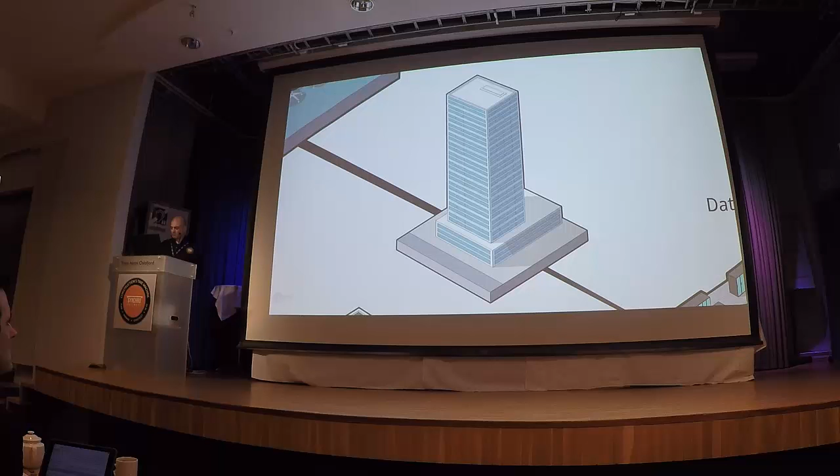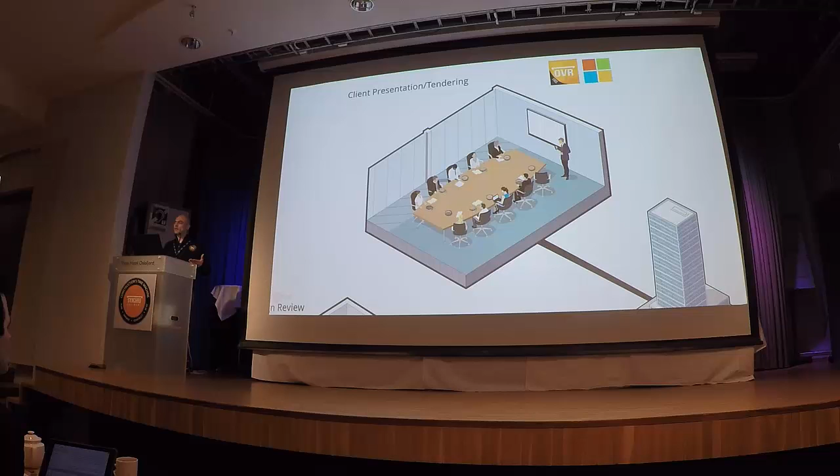So if you think about a scenario - a tendering presentation - you might have open viewer running and have your HoloLenses distributed around a table for your customers to put on. That's just a connection back to the server and through our API. We recently did a project with Skanska where they took a holographic animation model pulled directly from our Link server and presented the 4D animation as a hologram experience to the client. That job was recently won by the client. To my knowledge, it was the first time a 4D hologram had been used to present the approach to the project - not just a projection on a screen, but an interactive hologram.

We'll also look at this after the break too. We're getting into how you could interact with the 4D model with new forms of hardware—not just the HoloLens, but new ways of scrolling and spinning through time.

This is actually one of our customers, Steve Moore, who has prototyped this controller that lets you completely spin through the Synchro timeline just by spinning this dial. It takes away the need to use a mouse or be an expert in Synchro. These are pictures of the actual production happening at the factories. This is a full-blown prototype, now going into production and will be available soon in the market.

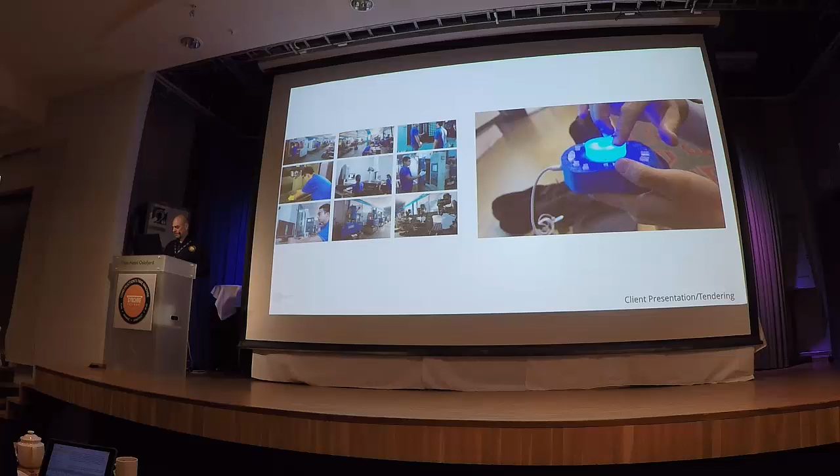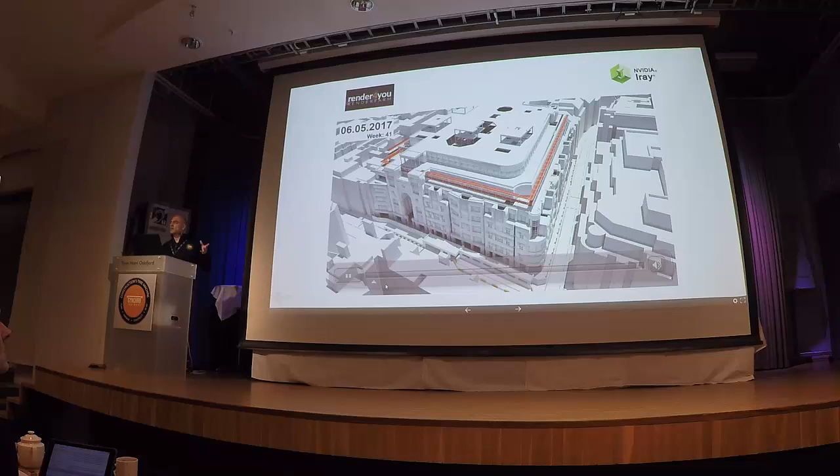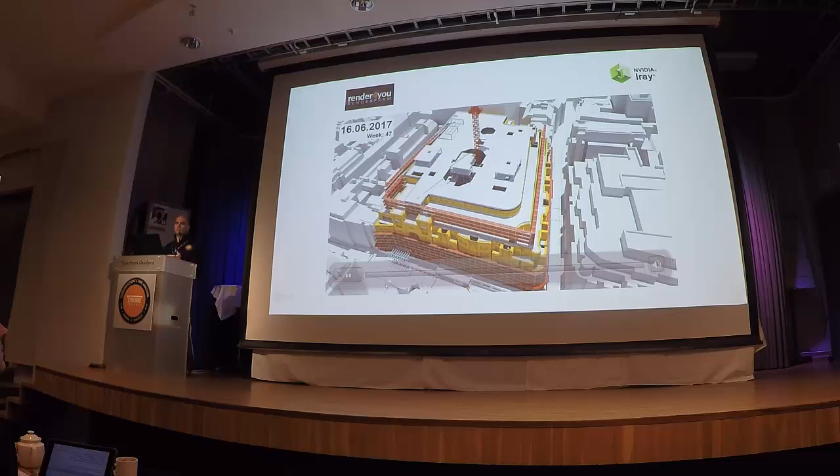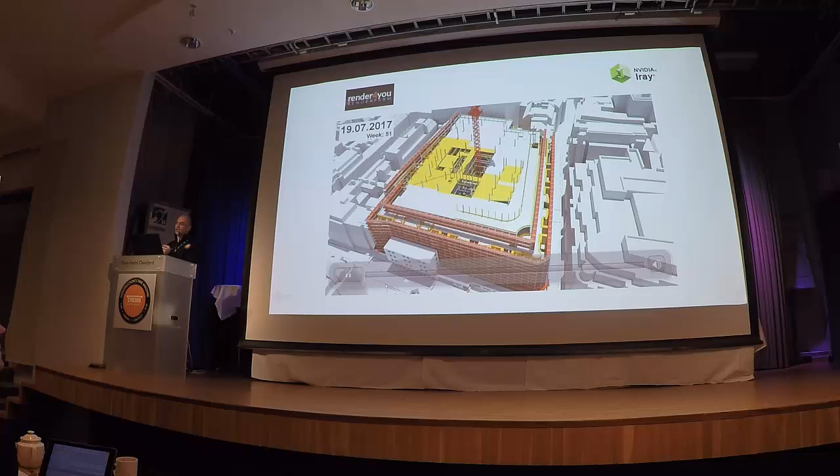Then we get into integrations with higher quality rendering engines. This is a use of NVIDIA iRay, rendering out on a render farm. With the new release, we'll be able to distribute a rendering over multiple nodes to cut down on the time it takes to render with something like NVIDIA iRay. This is just a way to take the quality up a notch for client presentations.

We jump over into the design review meeting. This is where you can bring Synchro Pro into play, connecting back to that work group, also with the HoloLens—we'll show some examples. We have three HoloLens here that you guys can come around and play with in the back.

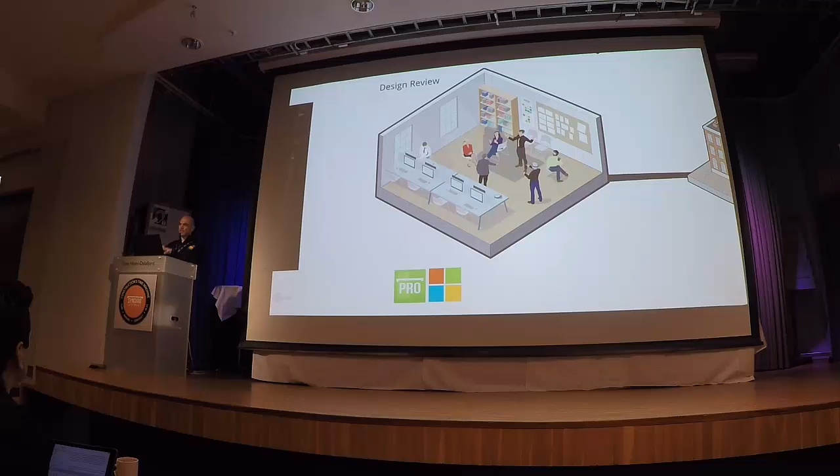We're now getting to the point where we can connect to a worker server through a link into the Unity game engine and just live stream the animation. So we're leveraging gaming platforms to deliver an experience of the Synchro model, taking the information outside the constraints of just the Synchro Pro interface.

Here's an example—it's a little jittery. This is a live recording out of the HoloLens, showing a project that we pulled into Unity and then live streamed out of the HoloLens.

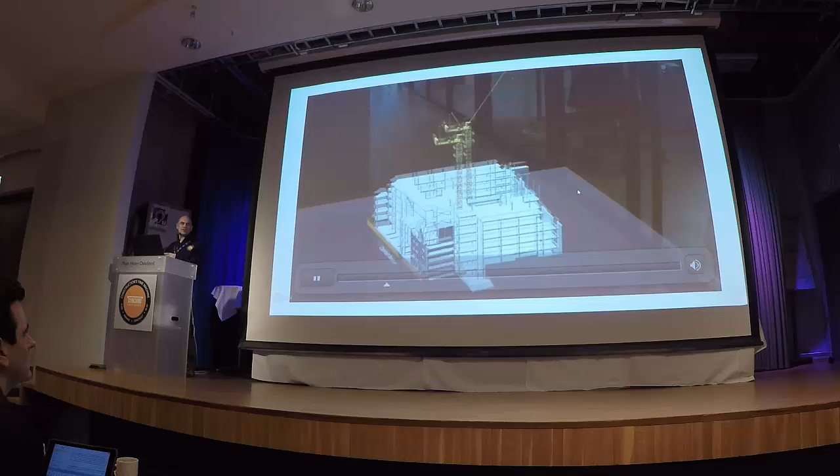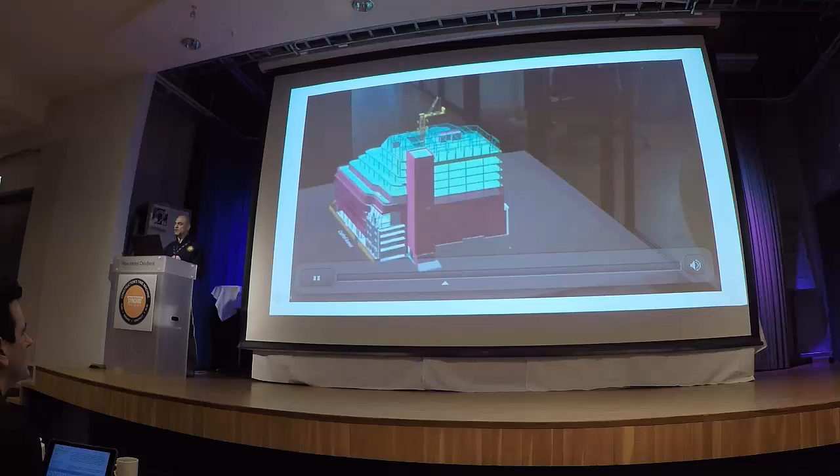This is the one where the client actually rented a high-powered gaming laptop, brought it into the tender presentation, and just played this thing through. The cool thing was there wasn't a lot of manual scripting—we didn't have to hire a Unity artist or game designer. We just built software that could connect back to the Synchro data source and pull it into Unity, then hit play and stream it over Wi-Fi.

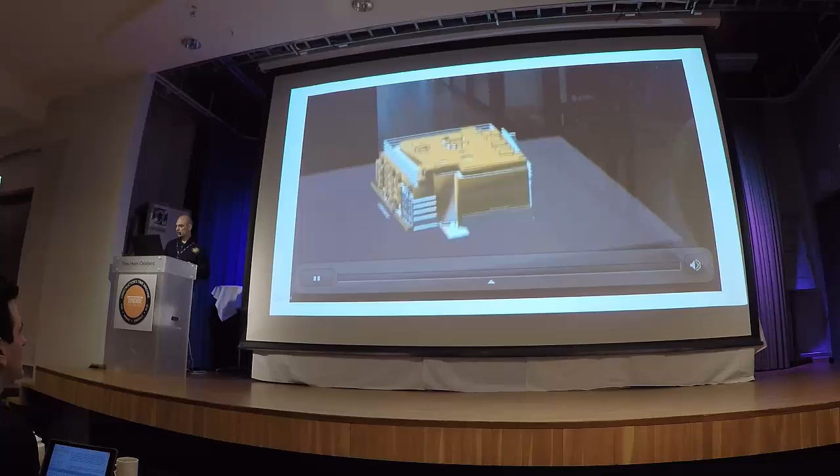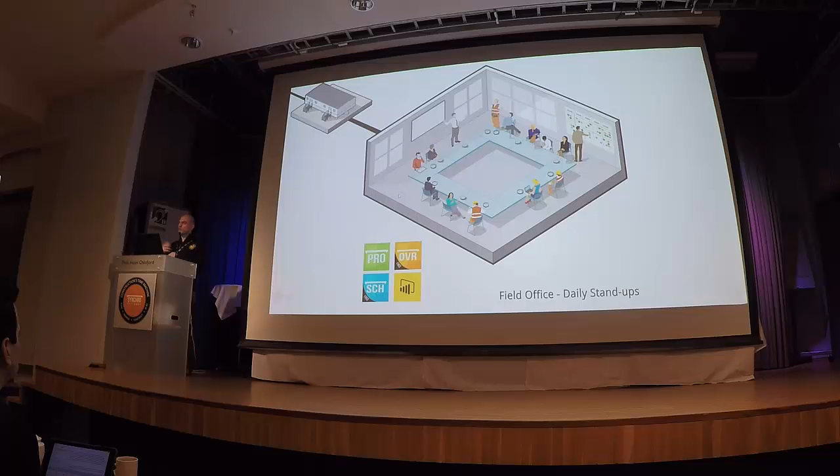Moving on into the field—how does Synchro impact work at the actual trailer? We're also imagining more devices in this space: Surface Books, HoloLens, projection boards, and even the use of Power BI, which produces analytic reports off the data we can pull through the API.

It's really interesting—once 4D comes into play, once Synchro gets into the trailer, it becomes like a hub for interaction. In the trailer, in the big room, you've got the Synchro model running, typically an open viewer, for daily or weekly stand-ups where the team and subs come in, review the work, ask questions, raise issues, and then go back and reschedule and resolve issues that come up.

So instead of looking at the Gantt chart on the wall, I'm seeing more and more of this type of environment—digital screens, the 4D, fundamentally part of that workspace now. Where I've been going, this is becoming standard, interacting with the digital medium and not just the Gantt chart.

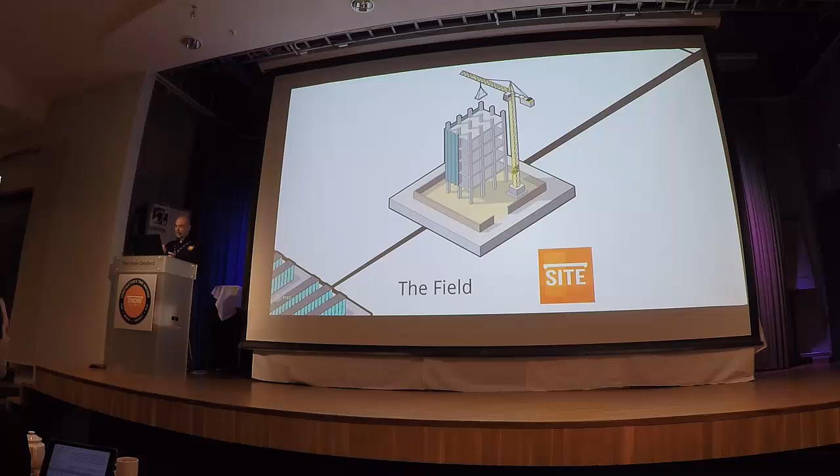And then moving out into the field. We've seen Synchro traditionally used effectively for tendering and presentation, showing the 4D, but for it to have true impact, it has to get into the field, and you have to use the 4D to status the work and track your progress, not just update sheets of paper.

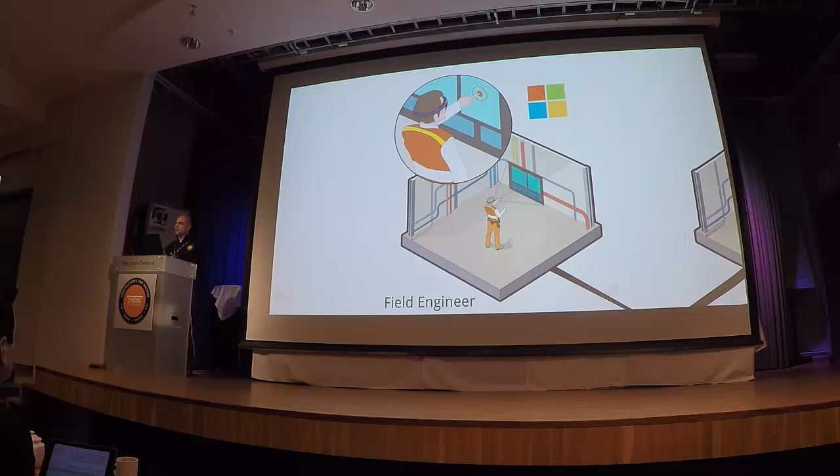So this is where we've really put a lot of investment into the API and building out our apps for both the HoloLens and the iPad for field engineer statusing. Something we're actively looking into now is how can we take a mixed reality device and integrate it with construction safety hardware, so you can actually go into the field and use this equipment.

With the mixed reality scenario, we're able to now overlay the 4D model at one-to-one scale with the construction environment, so you can see what's planned just by looking around the room. And then what we're working on now is the ability to just basically tap on objects that have been placed and record their status—do a field inspection, record status, update the Synchro model.

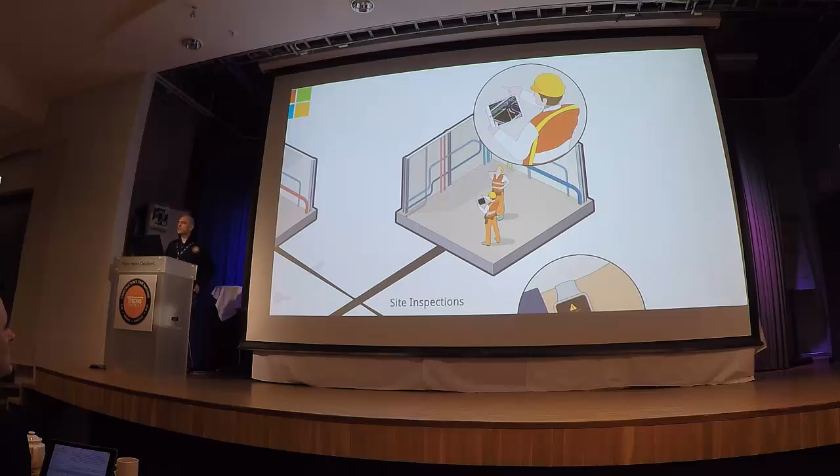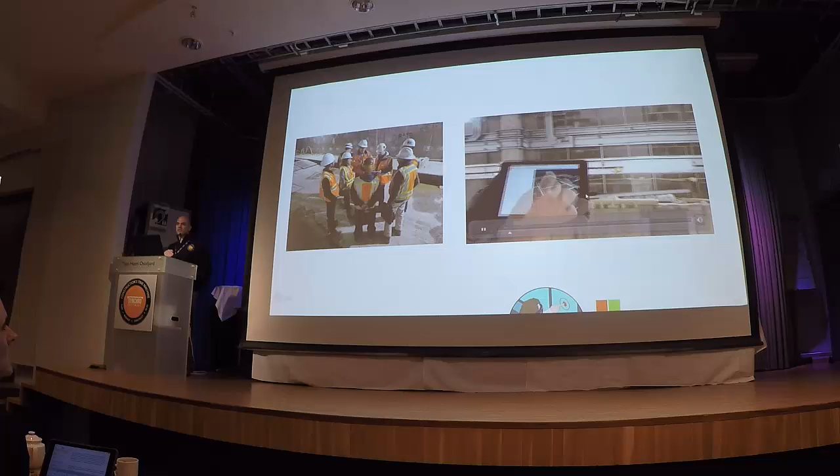And that's in use right now. So that's sort of the HoloLens, but our field application called Site is actually in use right now at a number of sites. I'll just show this one. This is in London at Crossrail, which is a massive underground subway line going through London, and they're using this on multiple stations to status and track all the MEP installation work going in.

So the field engineer goes down there once a week, gets the data for the Synchro model, goes into the field, traverses the model, traverses the real space, and tracks what's actually been installed, and say off variants. And then that goes back to Synchro and produces a weekly report. So we're seeing this being used in real time.

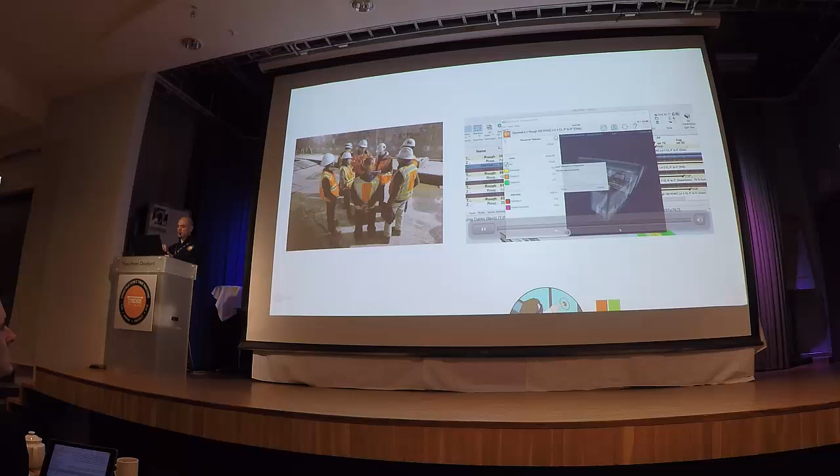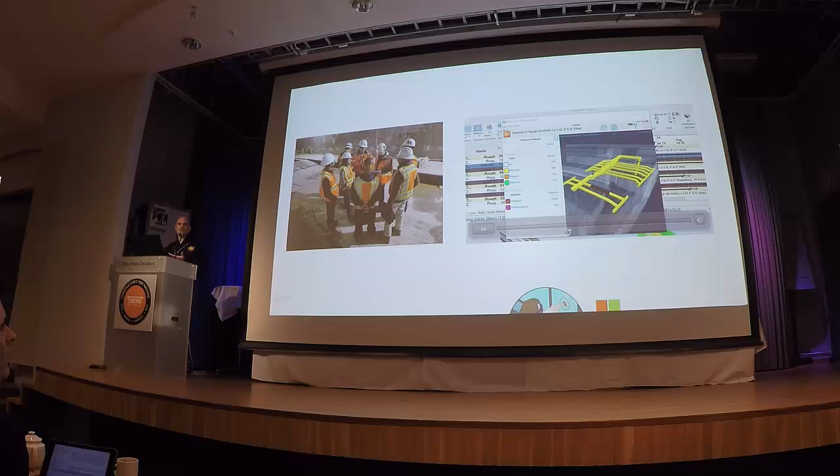Now, one of the issues with this form factor is you're holding it in your hand and having to go from a view of the model and then look around. We think with the HoloLens we can solve that problem. You literally just walk through the building and you don't have to orient yourself to the 3D model.

And then that shot on the left is also another use of Site at the East Side Access Tunnel. It's also another major subway being built in New York City, underneath Grand Central Station.

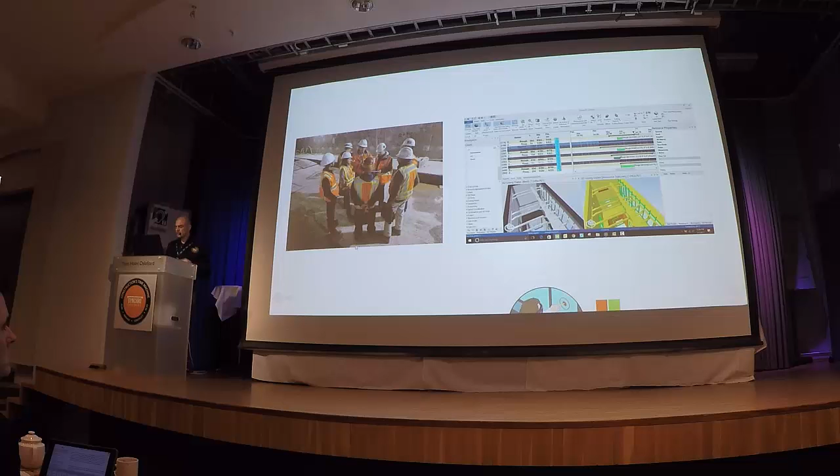And we think, why not? So once we have the API and we're already connecting to multiple devices, making an app that connects to a watch or a smartphone is just development effort at that point. And it's really just talking to you, the customer, to figure out what that app should be. I think what you'll see is there could be a whole ecosystem of third-party developers that can start to build apps on top of the Synchro API to move data back and forth.

For example, a recent project we did with a company that puts cameras on the site to take daily photographs of the site. We built an app with that company that would connect to the Synchro model, pull the daily snapshots out of the 4D model, line it up with the camera on the site, and then composite these two images. So you've got the camera image and the Synchro model now able to be compared, planned versus actual. And that's just a Unity application.

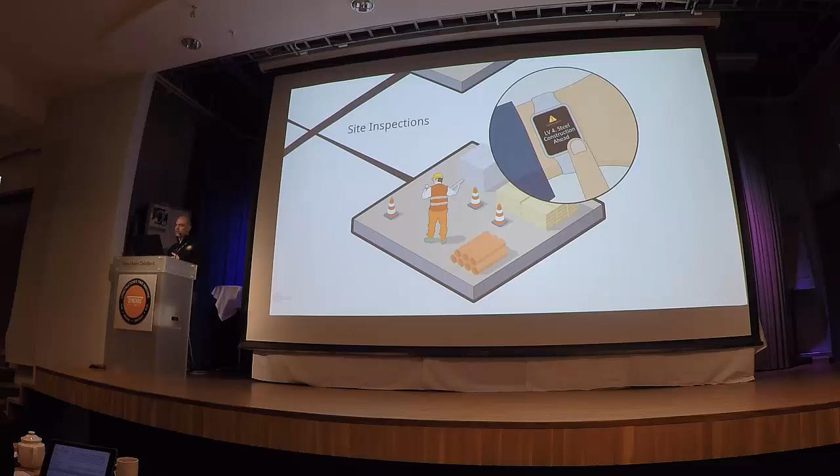Built on top of the API. And then, what about just the World Wide Web and dashboards and web interactions? So if all you want to get is stats and performance reviews or metrics on the project, a connection to the server through something like Power BI—now you could just do a GET request and see live updates on the model.

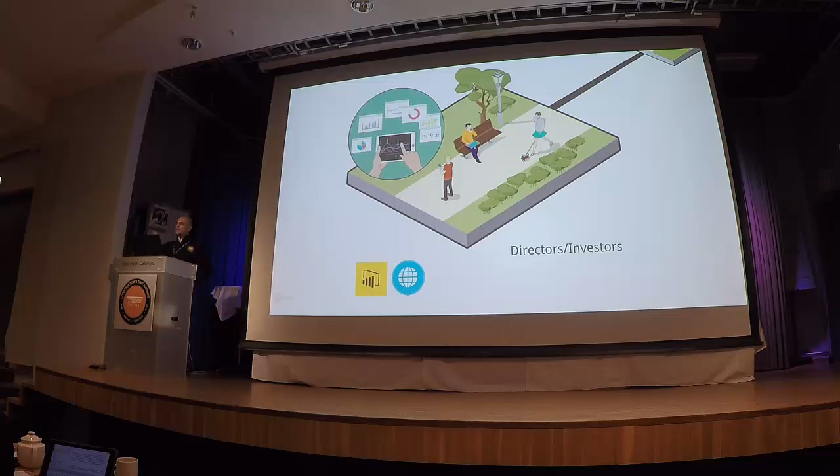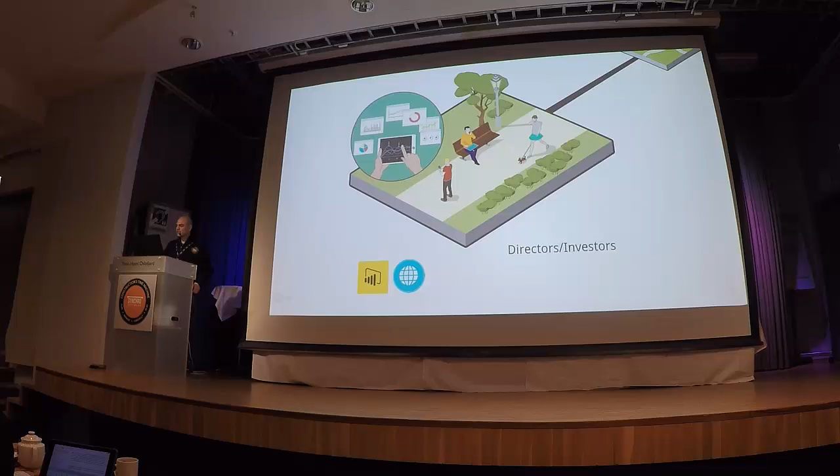And then this can be from anywhere, right? Anywhere you're connected, you should have access to that data. So that's sort of the picture of the platform, how we see it. Again, at the center is this database, and then it serves the entire life cycle of the project. So that's where we see 4D having an impact, from the beginning, from the tender phase, all the way to handover and down to field inspection. And it really is at this API workgroup level that's going to enable that.